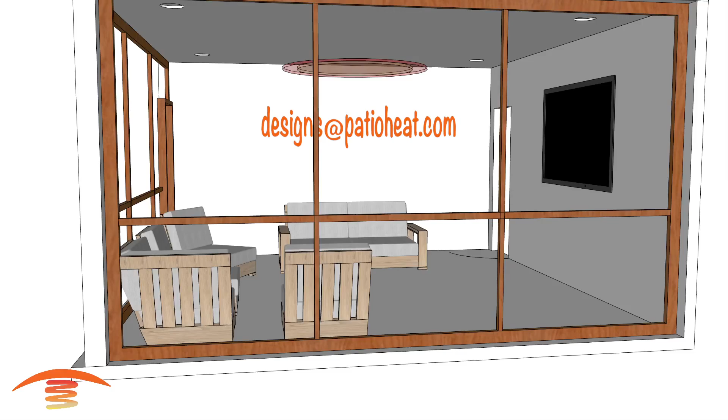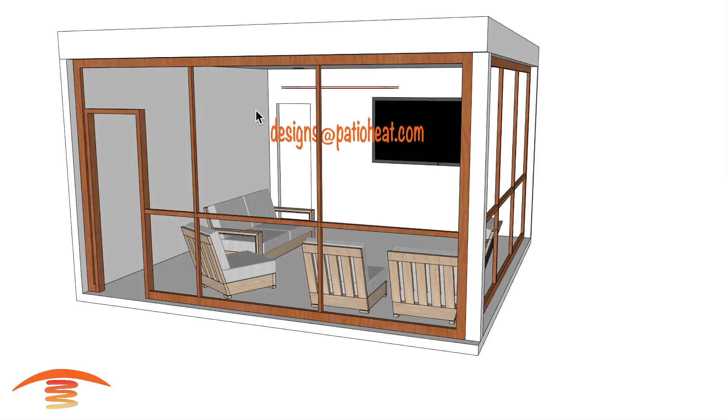Okay, so we have this residential application, and this is going to be in kind of an enclosed area. We have screened walls on this side here and this side over here, solid wall here, and then we have a solid ceiling. There is going to be a fan in the center.

Now they're not quite sure about what the true dimension is, so I put the 2 dimensions that they had given me. Let's go ahead and look at the overall dimensions that I have. So overall dimensions, I have 16'6" from the outside edge to the outside edge here, and then 16'2" this direction from here to here.

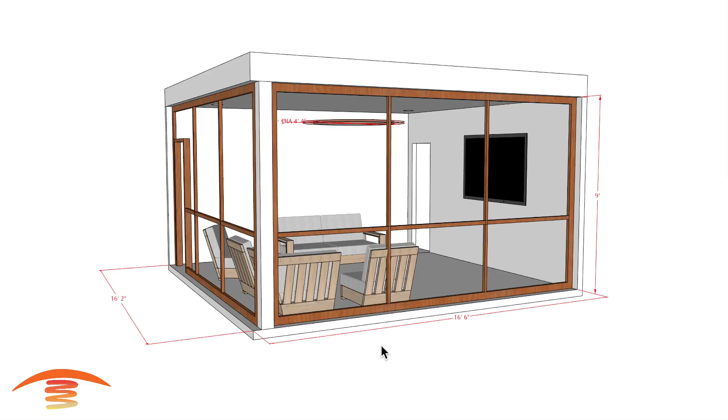Now, also the fan blades I have at 5'5" diameter and a 4'4" diameter on the inside here. I do have these fans. The blades are going to be approximately 12 inches down from the ceiling, and that's about it for the dimensions.

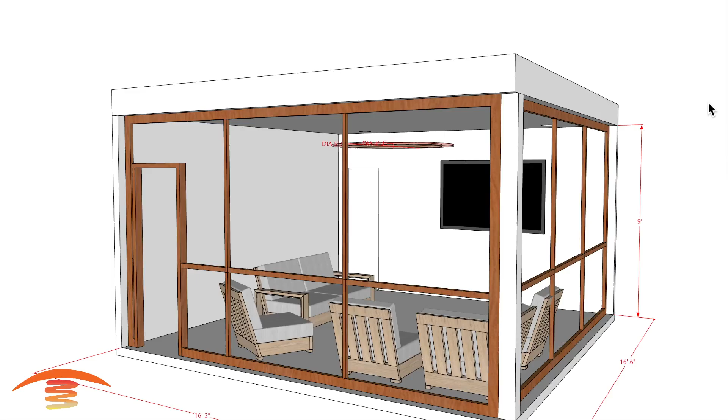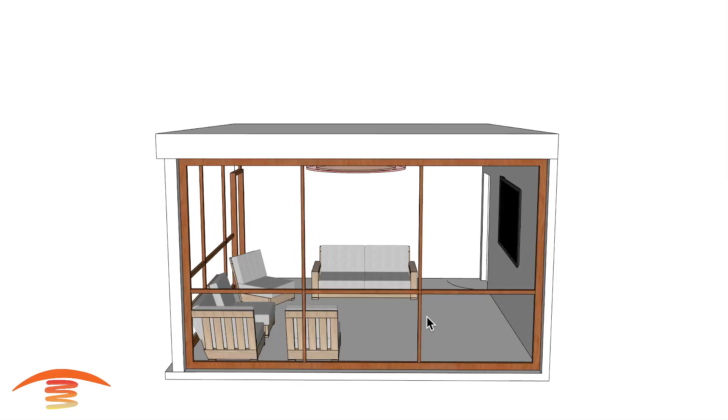Let's go ahead and look at, we have a doorway over here. This doorway is going to swing into the patio. And then there's a door that's going to be over here that's going to swing outside of the patio. I did not put the screen sections on this here, but there is a screen section here, so just keep that in mind. And there is a TV set over here.

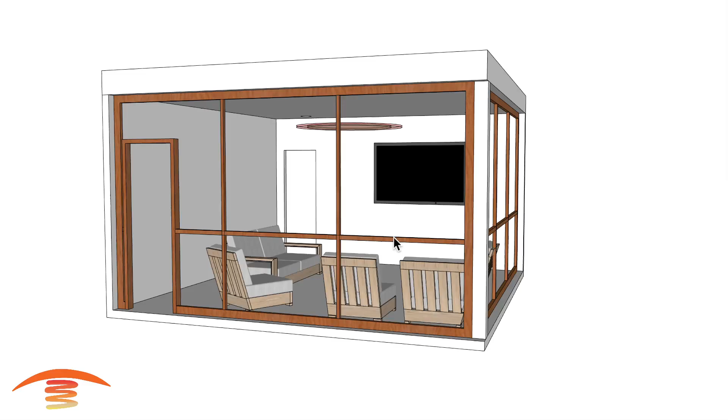Now, they're looking to heat up the spaces of the seating area that's going to be similar to something like this. And the main thing is this looks rather simple, but it's more complicated than it truly would be in order to heat up the whole entire space.

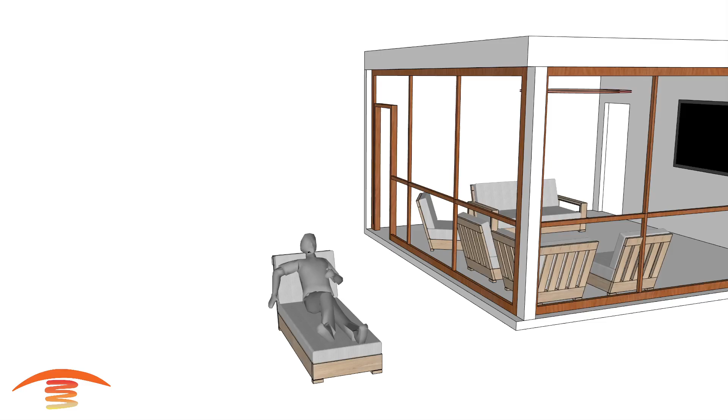What I really want to talk about first of all is let's look at this. Just, I have a model here, for instance. Now, if you were in the shade of the structure itself, let's just turn on the sunlight or shade. Here's the shade of the sun coming up from over here. If you were in the shade, you're not going to feel the sunlight itself.

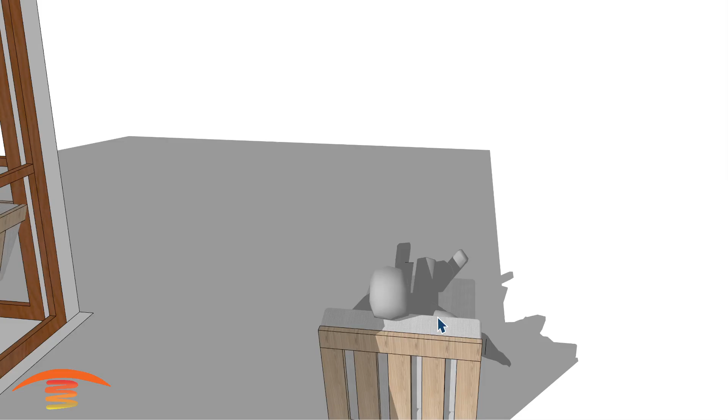So the sunlight is an infrared light wave, and here you can see this model. Half of the model is in the sunlight itself. I could actually move this over just slightly here, and you can see now, the majority of the body is actually in the sunlight. So you're going to feel the ray of the sun on this section of your body. However, you're not going to feel it over here. So you need to be in the actual ray in order to feel the warmth.

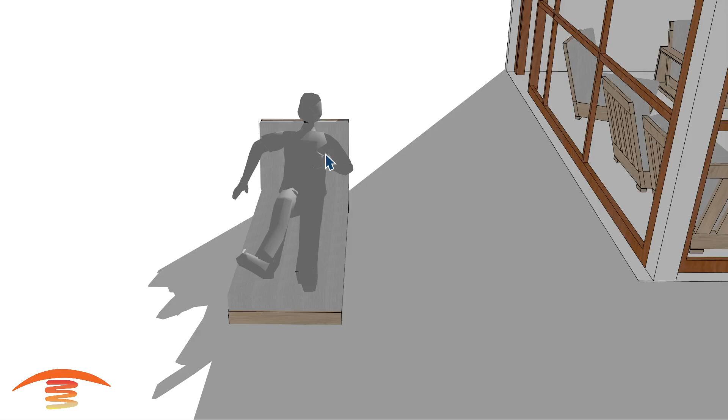The sun heats up the earth, and then the earth will offset or convection heat the air, but you need to be in the light wave of the heater in order to feel the warmth of the heater itself.

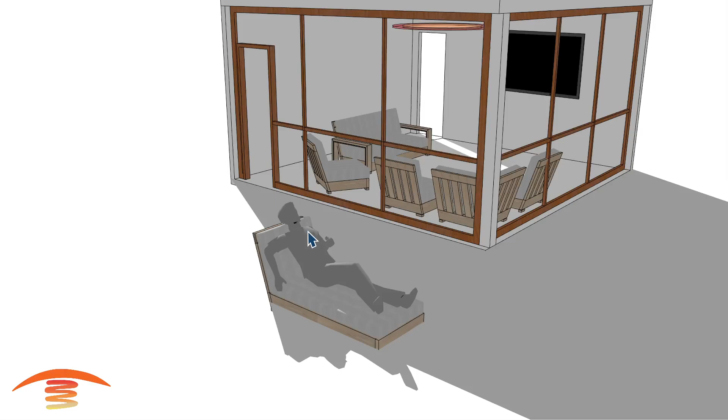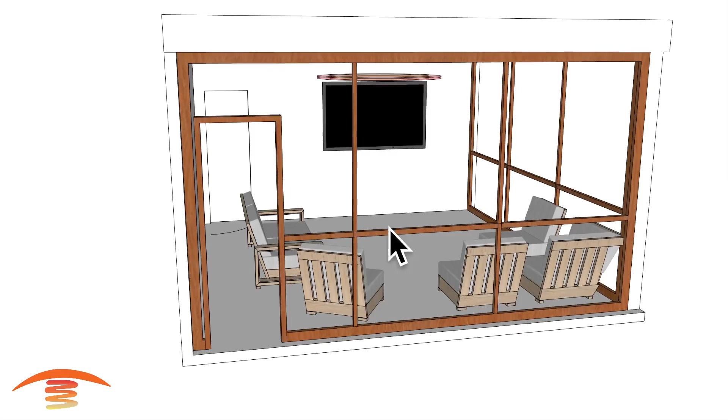So a heater in an application like this, I'm going to go ahead and turn off this model now. And a heater in the application like this, if you're not in that physical ray, it's not going to feel warm at all. So the temperature inside of the structure doesn't really change very much because if you do heat up some of the ground, let's say floors, tables, chairs, that heat will rise and dissipate into the atmosphere very quickly. So there's no real way to heat up the air. So you need to make sure that you're sitting in the ray of the heater itself.

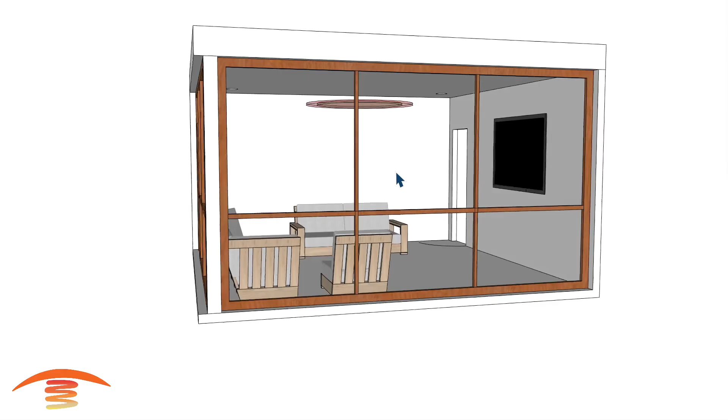So let's go ahead and look at one option. The first option I would probably look at is possibly using some slimline units. I'm showing this first, even though this particular customer is looking to place the units inside of the ceiling up here. So we're going to talk about that in just a minute.

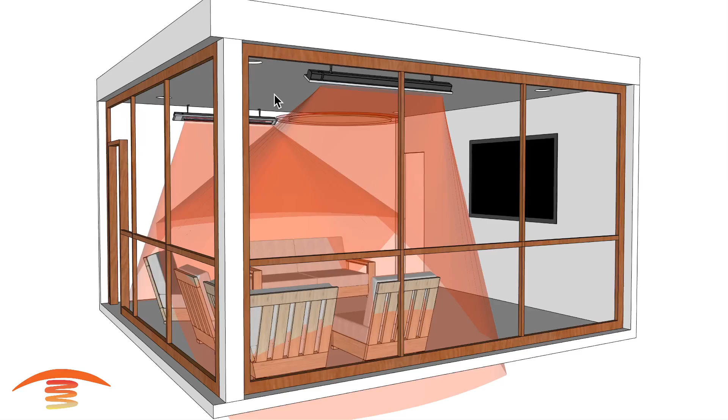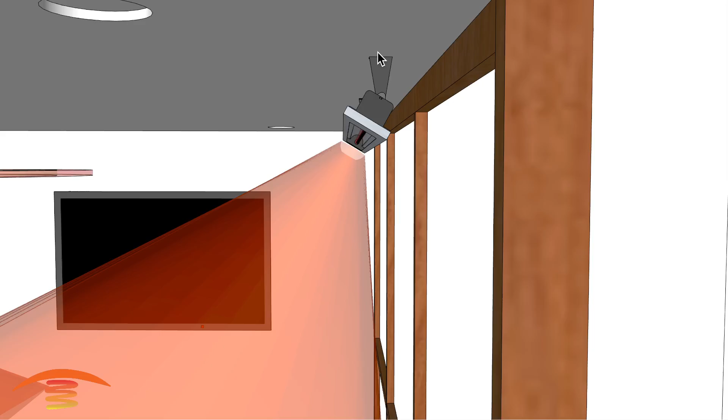But I have 2 of the 4,000 watt slimline units. I have them so that they're 6 inches of clearance from this edge here to this edge here, and I have them mounted on the ceiling so that you can actually do a 45-degree tilt on the heater itself. If you mount it on a vertical surface, it can only come down 30 degrees, so it will be pointed more towards this direction over here.

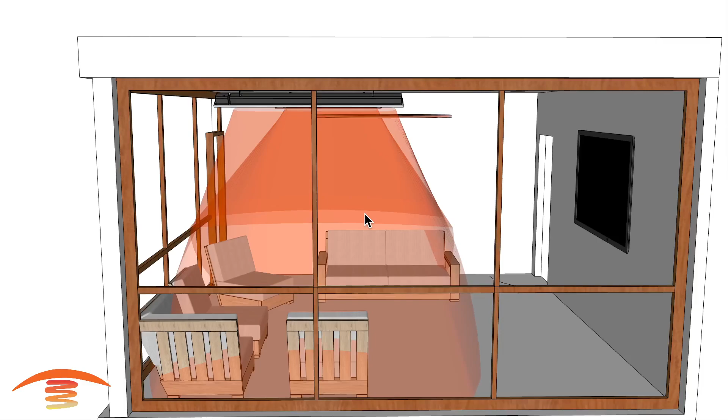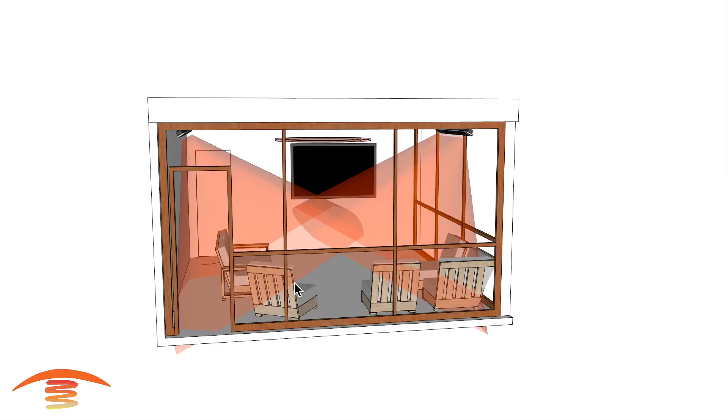The other thing is, I've offset these from the center of the structure itself. I believe I have it like 18 inches from the center point to the center, offset. So this would be the center point of the heater, placed in the center of the patio. I pushed it to the left at 18 inches, and you can see the footprint of heat is really good for an application like this. You do have nice crossover rays, so the center section is going to be just as warm as the outer sections in this particular application.

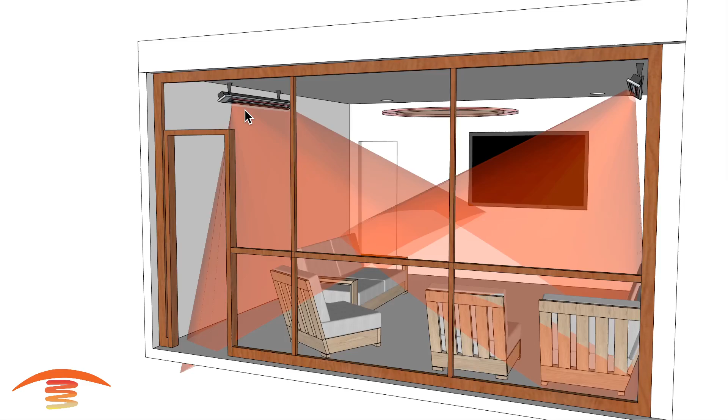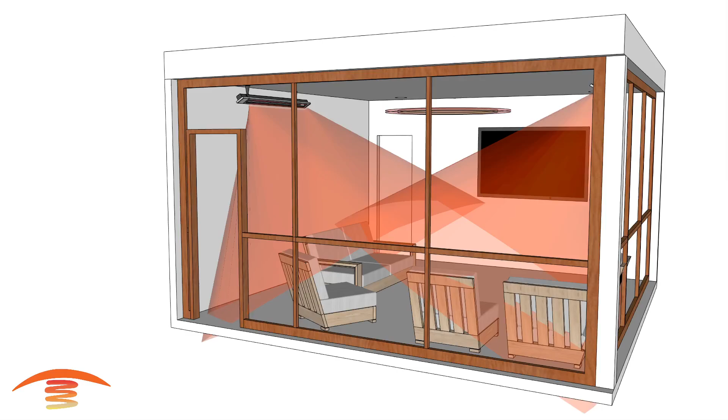But again, these are 4,000 watt units, and so on the very cold nights, it may or may not be sufficient enough, but it's going to be 9 inches lower than the ceiling, basically, than a flush mount unit itself. So, all right, let's go ahead and turn that off. That would be one option.

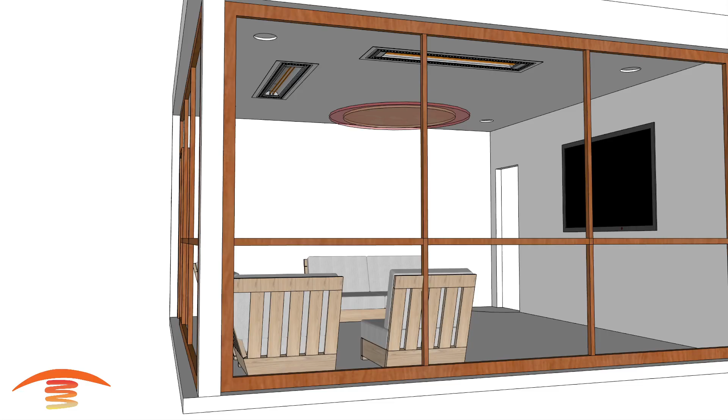Let's look at another option, which would be to possibly place some heaters - this is the application they're looking at. I'll turn this off and back on here. So you can see we have two 6,000 watt units, basically centered within the span from left to right here, and centered in that span front to back.

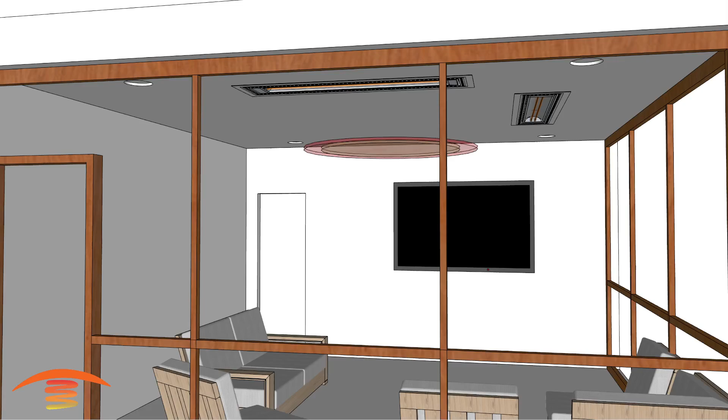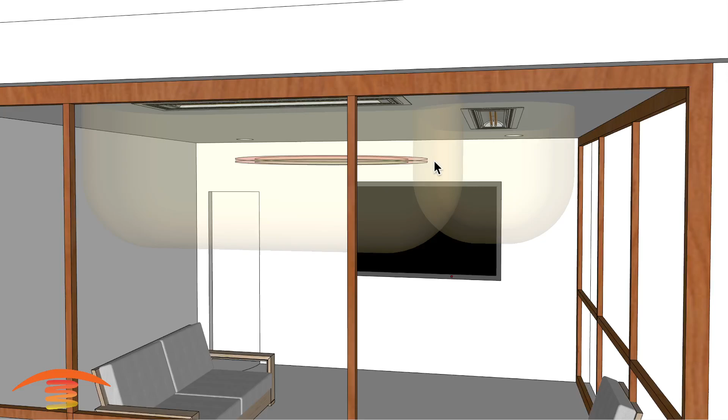The other thing is the clearance below the heater itself - I have it 18 inches from the edge of the fan blade. That's if these fan blades are combustible. If they're steel fan blades, you could move the heater over a little bit, but you don't want to penetrate, like an aluminum blade, and cause it to start drooping down the road.

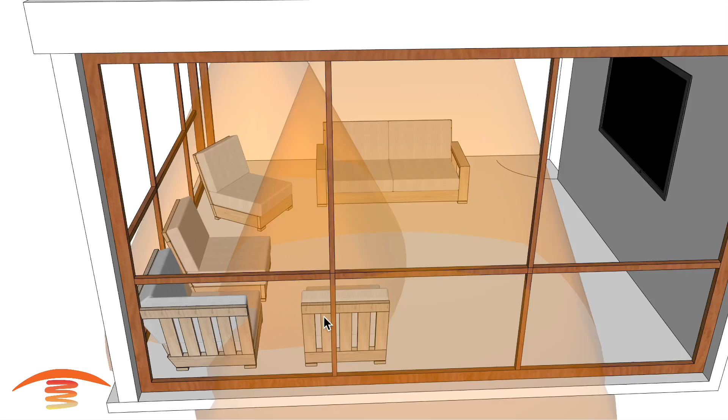But you could move it over slightly if this fan is non-combustible itself. Let's go ahead and look at the footprint of heat - we'll turn that on. You can see here that we are superheating this spot right here, and this location over here is pretty warm and would be comfortable, but we're not heating up this spot here, nor are we really heating up over here at all. So this would not be my preferred application.

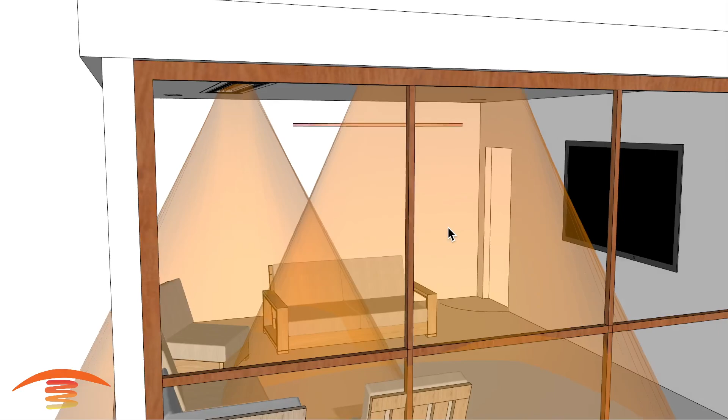So let's look at something different. Oh, by the way, because these are 6,000 watt units, you would want either a control system where you can dim these heaters down, or a duplex switch where you can turn one element on, or both elements on, or both elements off. Just so you know that.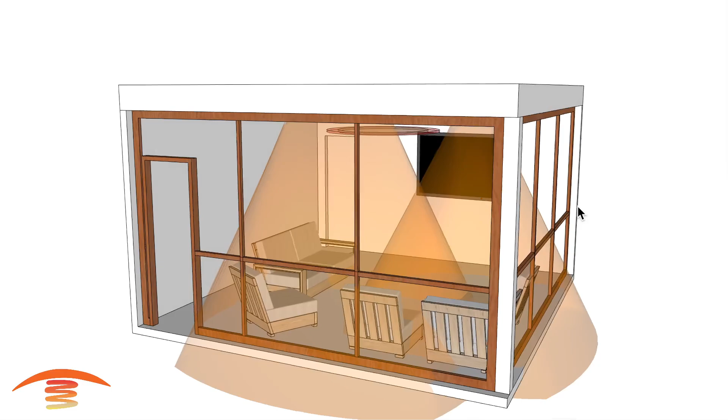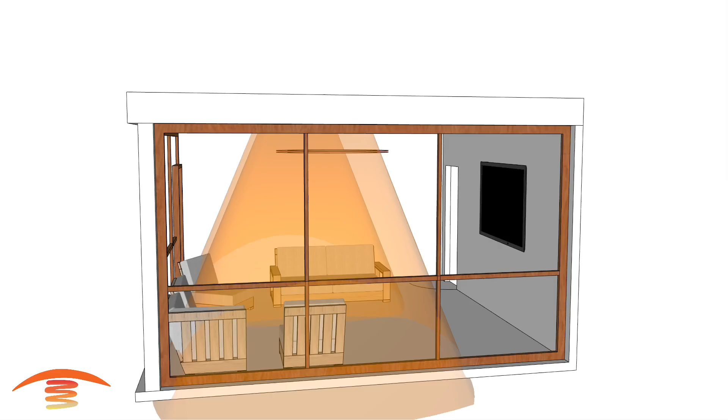So that is one other option. And I'm going to show you another option, which would be the new heater. There's actually a new heater that's just coming out this month, let's see if I can find it here. Nope, not that one. Here we go, let me turn that off. So these are 5,200 watt units, 48 inches long from this point here, from the heater itself to the heater itself.

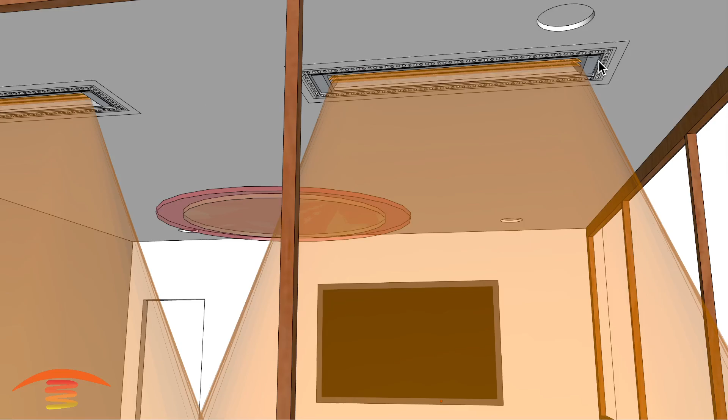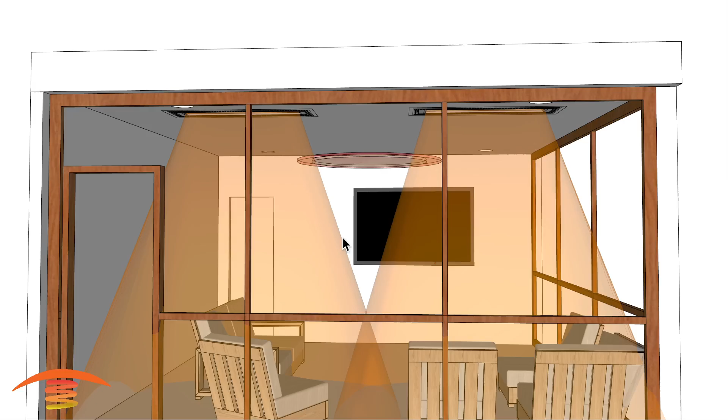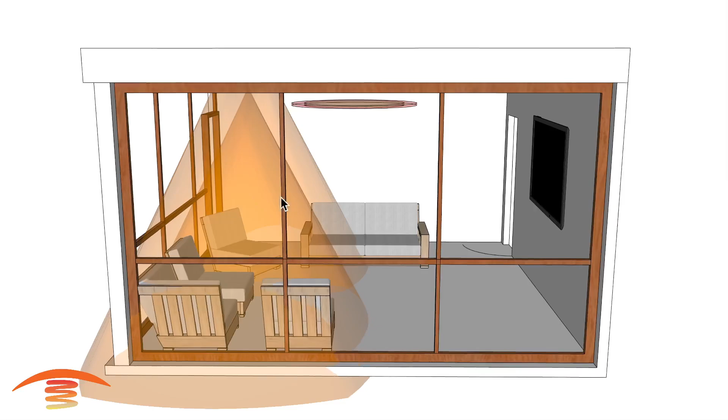Now, this particular design I'm showing isn't specific or exact at this point because I don't have the true dimensions yet, but knowing it's going to be 48 inches from here to 48 inches over here, 5,200 watt units - they're going to be a very nice application for a lot of different jobs. Again, you'd probably want a control system for something like this. But you can see with two units like this, we're still not heating up the entire patio, especially over here, very well. This would be a very nice warm spot, and something I would consider if this is the only area we're looking at heating up.

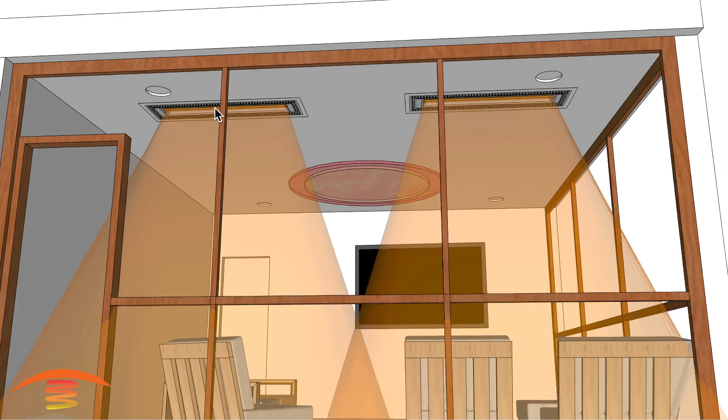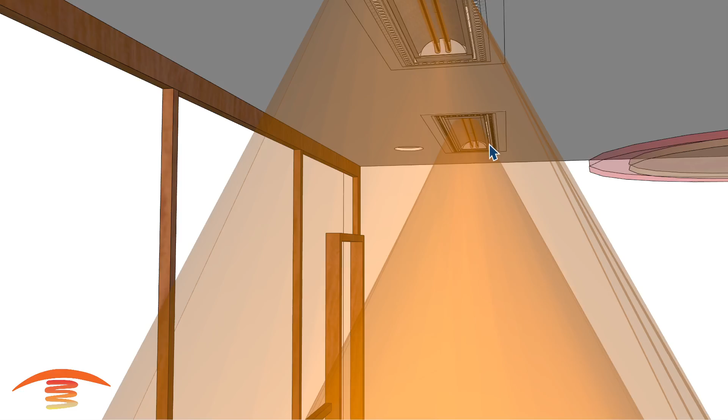You can see we're almost heating up half of this sofa over here, but again, you would only feel the warmth if you're sitting over here. The other thing I should mention is the distance I have these at - and again, these dimensions aren't perfect yet, but you can see I have them at 7 foot 6 inches center to center on each heater. And again, 18 inches of clearance from the outer edge of the larger fan blade to the inside edge of the heater itself is the other thing you should be aware of.

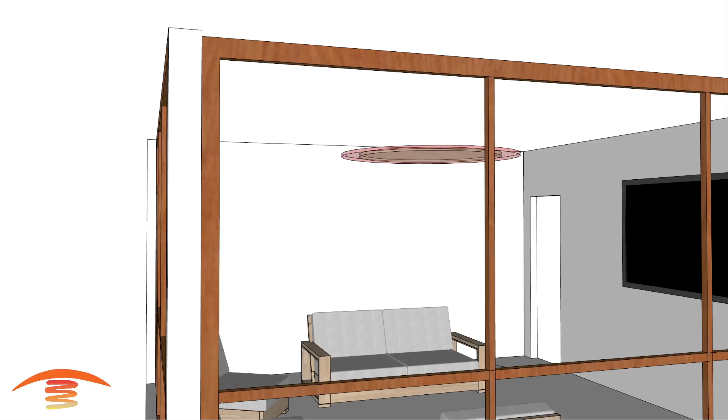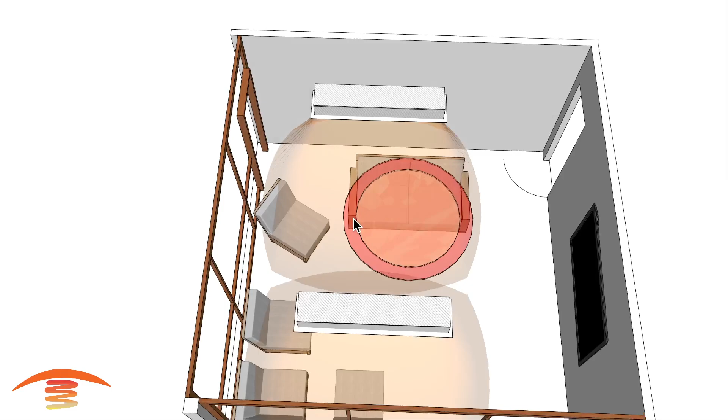Okay, let's look at the last option here. Let's turn that off for a second - I believe this is, nope. Here we go. So what I've done here is I've taken two of the CD 6024s, offset them 18 inches to the left, and you can see our footprint of heat is much better for the entire space.

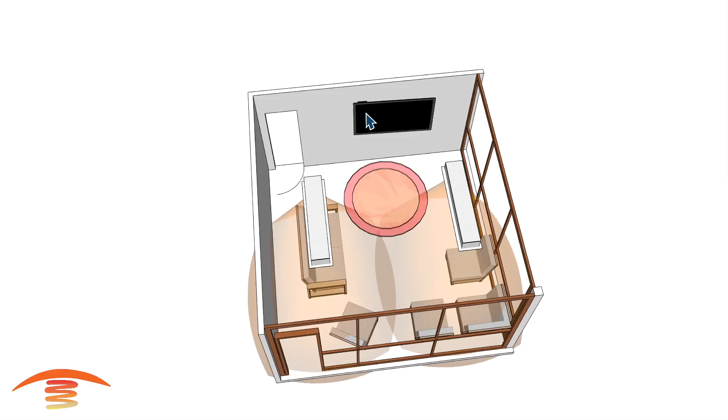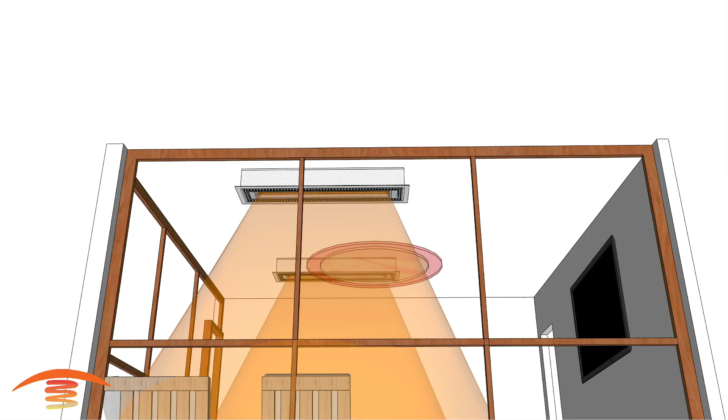You could actually go probably another, maybe 4 inches to the left here. Let's go with 5 inches - yeah, about 5 inches further. But this would be probably my preferred application of all, especially for the seating position that we have here. Let's see if I have the lid on here properly. Yeah, I don't have the lid on properly. But in any case, yeah, this would be my preferred application for this particular application itself.

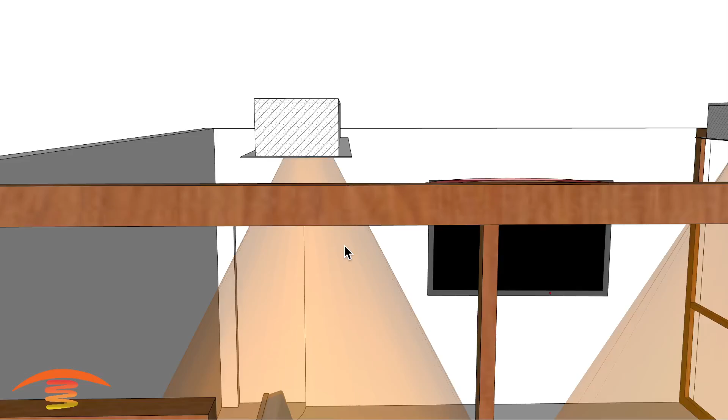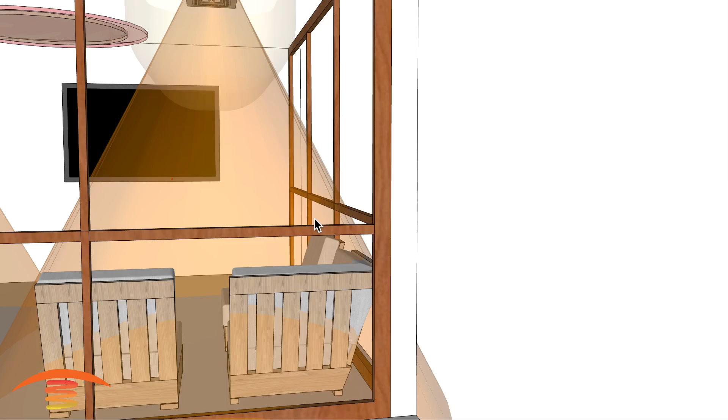So the heaters themselves again have 18 inches of clearance from the edge of the heater to the edge of the fan blade, and you can see we've met the clearances to the outside edge here and here. You can see there's a penetration into the screen section down here, but that would be fine because it's not intense enough to cause an issue with the screen itself. So again, this would be my preferred application if this is possible. I'm not 100% certain they can actually run these heaters in this direction here and here, but this would again be my preferred application.